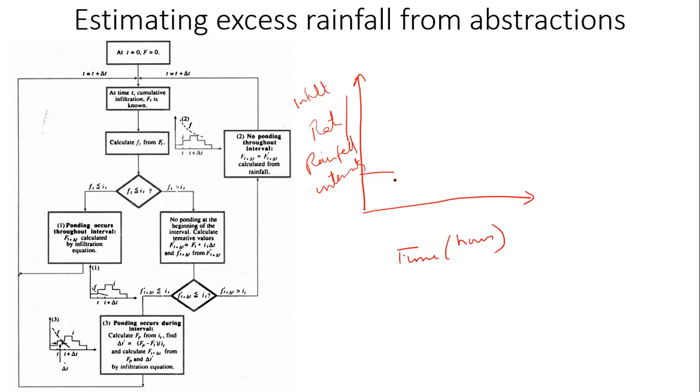So let us say I'm given the rainfall intensity as a function of time. First time step there was some rainfall intensity, next time step some other rainfall intensity, then something else, and so on. So what is this kind of a curve called?

Hyetograph. Yeah, this is the rainfall hyetograph, right? We can either call it hyetograph or call it a rainfall hyetograph. It means the same thing. Okay. Now this is given to you and you know the characteristics of the watershed. When I say characteristics, I mean what kind of soil is present. Okay. We know the characteristics of the watershed.

And then we know that the infiltration capacity of the soil changes as a function of time, right? Because rainfall happens on that watershed, this infiltration capacity will also change. Okay. So let me just draw one random, let us say the infiltration capacity. I'm going to try to draw it very carefully. Okay. So let us say that this is one scenario.

Where the infiltration capacity and the, see, I've deliberately drawn it like this. See the way the dotted line has been drawn, it is right at the intersection of this delta T, right? So I have, let's say, T1, T2, and T3, right? So exactly at T2, the infiltration capacity is falling below the rainfall intensity, right? This is one possibility. Let's say this is possibility number 1. This is how this dotted line can intersect this curve.

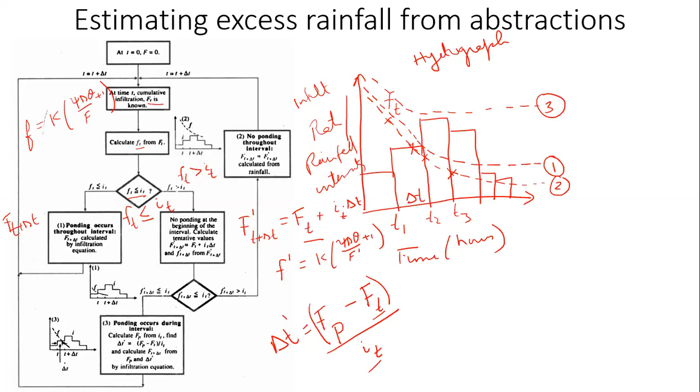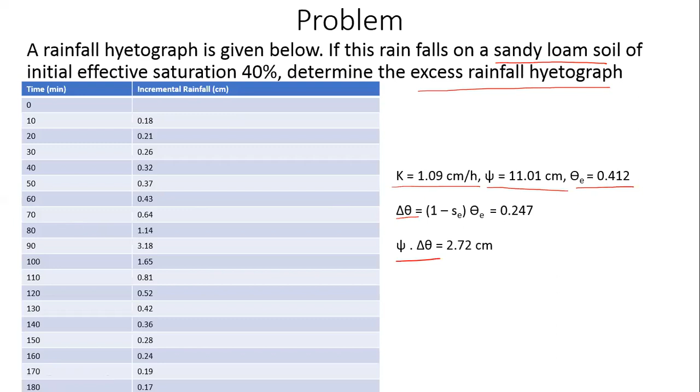Okay, so now we will go back to that problem that we started working on last time. In this particular problem, the incremental rainfall in every 10-minute interval is given to you, and the kind of soil is known, sandy loam soil. The effective saturation is 40%. So using the available table for hydraulic conductivity and suction head, you are able to get all these factors. K is known, psi is known for this kind of soil, theta e, the effective porosity, is known. And since you know the effective saturation, you find delta theta, and then psi delta theta, which is all required for your Green-Ampt equation.

So what was given to you was the incremental rainfall. You converted it to rainfall intensity in every 10-minute duration. Once you have the rainfall intensities, for every delta t, you compute the infiltration rate at the beginning and at the end of the time step, and compare it to the rainfall intensity. So let us look at the first. At time t equal to 0, cumulative infiltration is 0, and potential infiltration rate is undefined, it's infinite. It can't be infinity, it's some large number.

Then we compute the temporary values, capital F prime and small f prime. Since ponding has not started at time t equal to 0, you compute F prime at t plus delta t, which is at 10 minutes. It comes out to be 0.18 centimeters. Once you obtain this capital F prime, you put that into this equation and compute the small f prime. It comes to 17.57 centimeters per hour.

At the beginning of the time step, small f was infinity or some very large number. At the end of the time step, small f is 17.57 centimeters per hour. You compare these two numbers, this very large number and 17.57, to 1.08. What is your conclusion? Has ponding occurred during the interval?

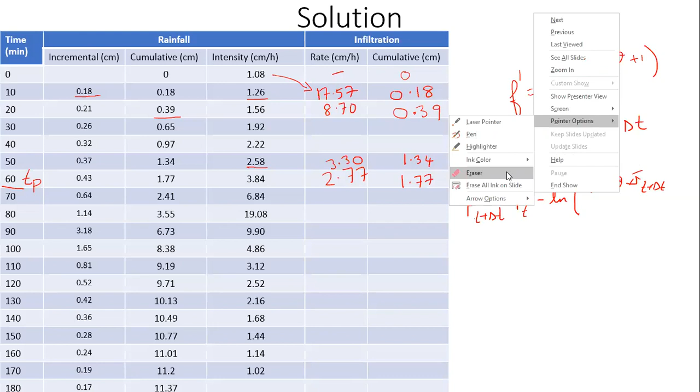Plus F of t plus delta t divided by psi delta theta plus F of t, equal to K times delta t. Agree with this? F of t plus delta t minus F of t minus natural log of, oh, one more thing, I forgot. This natural log must be multiplied by psi delta theta. Sorry, I forgot that. So F of t plus delta t minus this. So this is your Green-Ampt equation.

Once time of ponding has been reached, this is how you estimate the cumulative infiltration at the end of the time step, or during the time interval. Okay. So now what is the procedure for solving this? What are the knowns here? F of t is known, psi delta theta is known, K is known, delta t is known. The only unknown is F of t plus delta t, right?

So you can rearrange this. Everything is known. You can rearrange it such that you get F of t plus delta t on both sides of the equation, right? Then you make an initial guess, put it in and solve it iteratively, and you'll get a final answer for F of t plus delta t. You understand what I'm saying? Yes, sir. It's the same process. It's an iterative process. You put it in, and then you get the answer.

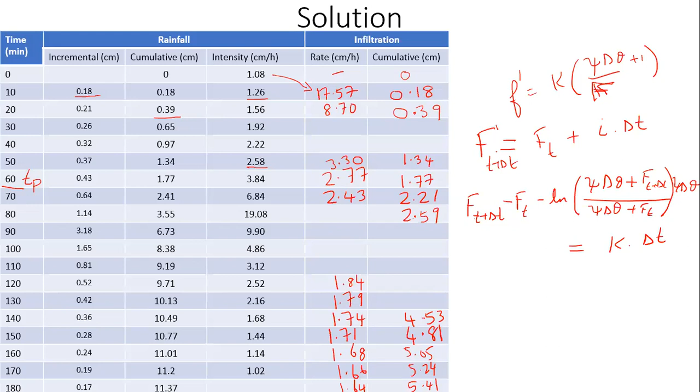Okay, so now this is the interesting thing. The intent of the problem was to estimate what the excess rainfall is. We have still not obtained that. All this while we have only been computing how much infiltration has happened. But if I know the total rainfall and I know the total infiltration, is it not relatively easy to find out what the excess rainfall is? So let me just go to the next slide.

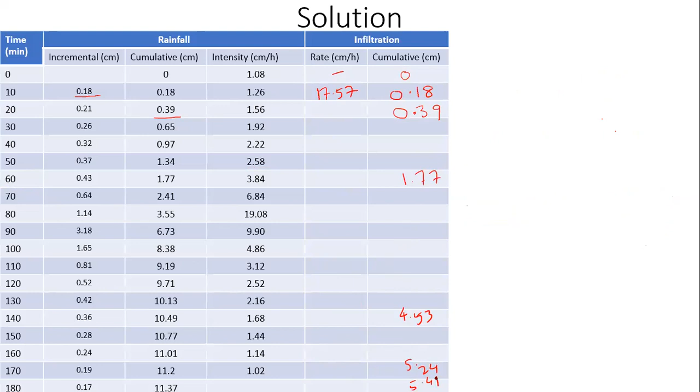So on the next slide, assume that all these numbers are populated. I'll just populate a few more numbers: 1.77 at 60 minutes, then at 140 it becomes 4.53, and at the end it becomes 5.24 and 5.41. So if I have this entire column, can I not estimate what the excess rainfall would be? It's very easy, right? Excess rainfall, again, you can do it as incremental and also as cumulative.

Up to time t equal to 60 minutes, will there be any excess rainfall, or in other words, any runoff? No, sir. Right, there'll be no runoff. So at t equal to 60 minutes, cumulative excess rainfall is 0. From the next time step onwards, you start getting excess rainfall. And how much will it be? Let me write down the next number also. It's 2.21. So cumulative rainfall at the end of 70 minutes is 2.41 centimeters. Cumulative infiltration at the end of 70 minutes is 2.21.

So therefore, excess rainfall must be 0.2 centimeters, right? That difference must have become excess rainfall or runoff. You can compute the incremental one also. No big deal. And similarly, you just keep going down. 2.21, next one is 2.59. What will the number over here be? It will be 3.55 minus 2.59. Correct? 0.96 and so on. Okay, so let us come to t equal to 140 minutes.

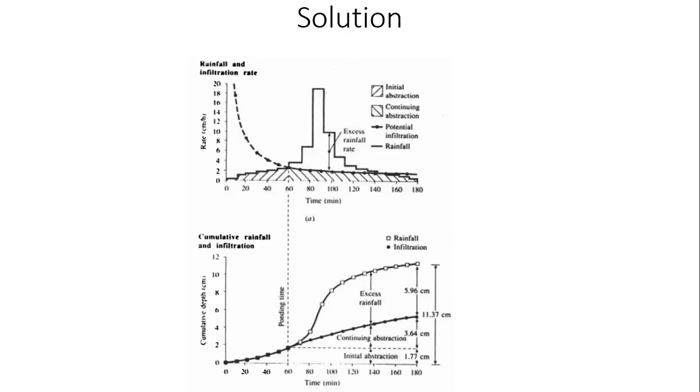So the next topic that we'll talk about is the SCS curve number method, which is another method to estimate runoff, right? So the challenge is that estimating runoff is such a complex task that there's not just one, there are multiple methods of estimating it. We have looked at the phi index as one way of doing it. Now we have looked at using the infiltration equation to estimate the runoff.

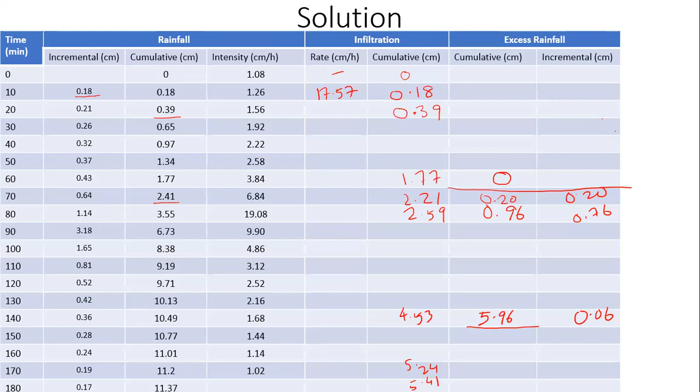The next thing we'll look at is to use this SCS curve number. CN stands for curve number, the curve number method to estimate runoff. So since runoff is such a complex process which involves so many of these different variables, there are many different ways of doing it, and each method has its own advantages. We'll be discussing this curve number method in the next class.